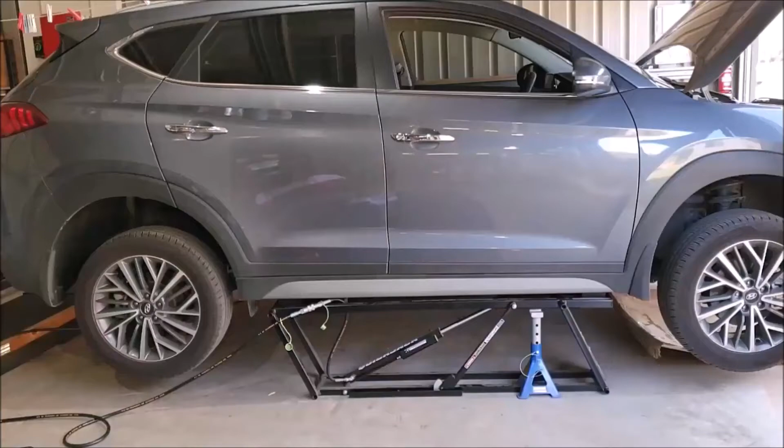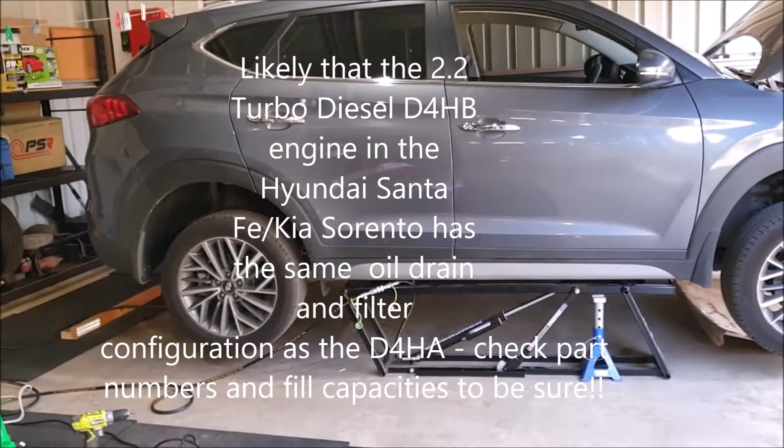Okay, today we're going to do an oil and filter change on a Hyundai Tucson. So this is a 2019 TL series. It has a 2-litre turbo diesel engine. So it's the D4HA Hyundai turbo diesel 2-litre. So that same engine's in the Kia Sportage as well. So if you've got one of those, or anything with a D4HA diesel, this video should apply to you and give you a helping hand.

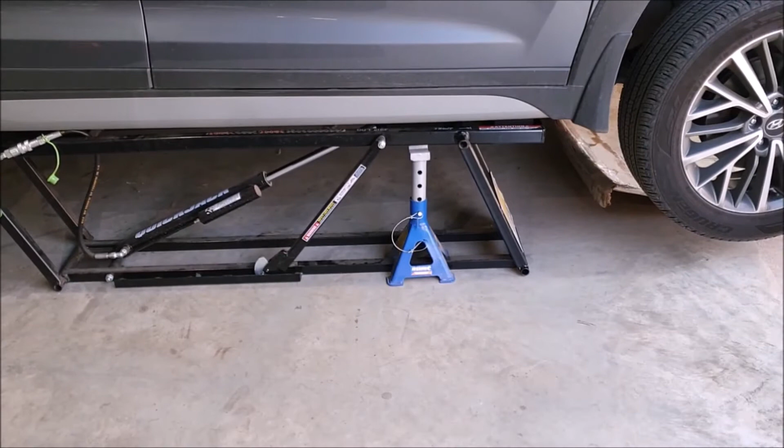So we've been for a drive. The engine's up to temperature. It's been cooling for about 15 minutes. I've got it up on the quick jacks. I've also thrown in some jack stands just in case something fails. We've got something that hopefully might prevent me from dying. Also, I've thrown a sheet of cardboard under the car just to catch any oil spills, just in case I slop some around. Keep the garage floor nice and clean.

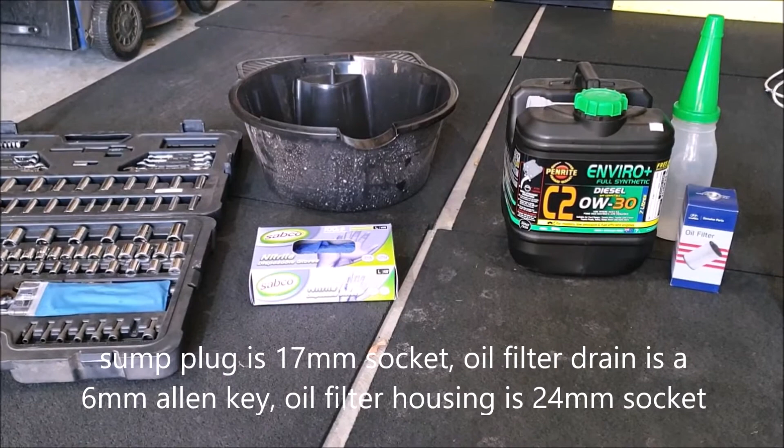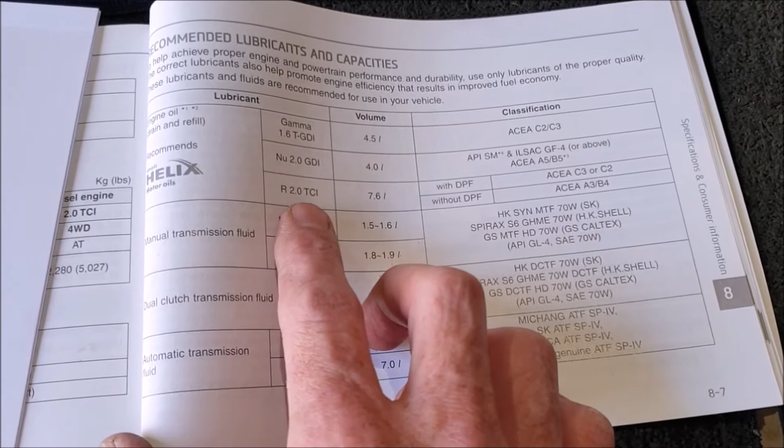So we'll just run through what you're going to need. I haven't got the underside tray off from the engine yet, so I don't know what size socket the sump takes, but I'll fill you in on that as we go through. Okay, so we're going to need some oil. So we're using a C2 0W-30. If you check your owner's manual, you can see here, I'll just try and focus on that. So this is the 2-litre diesel. Sump capacity with a filter change is 7.6 litres.

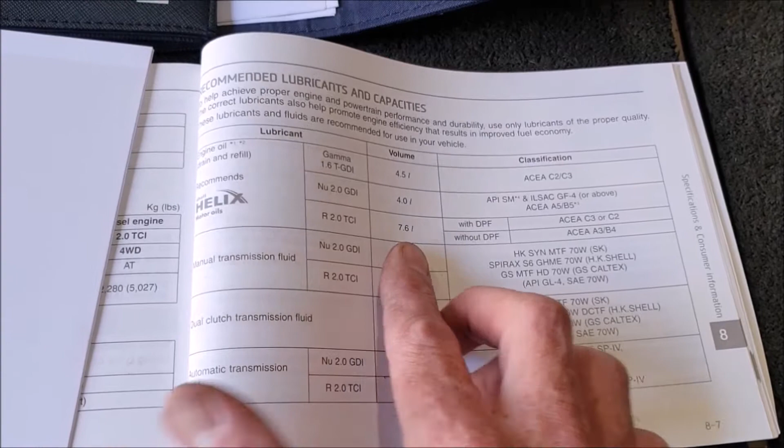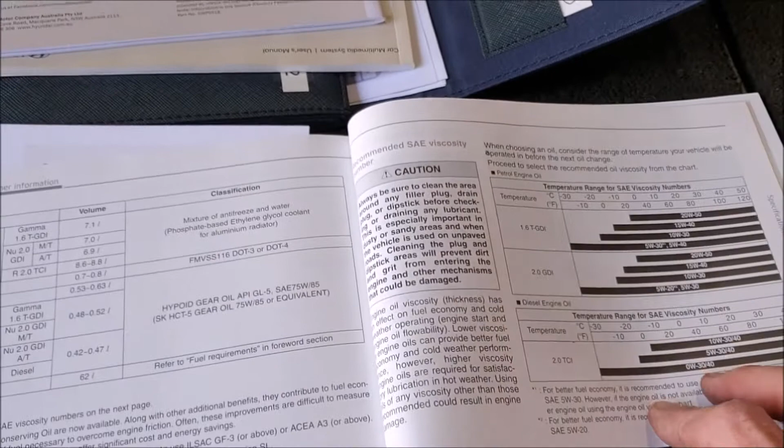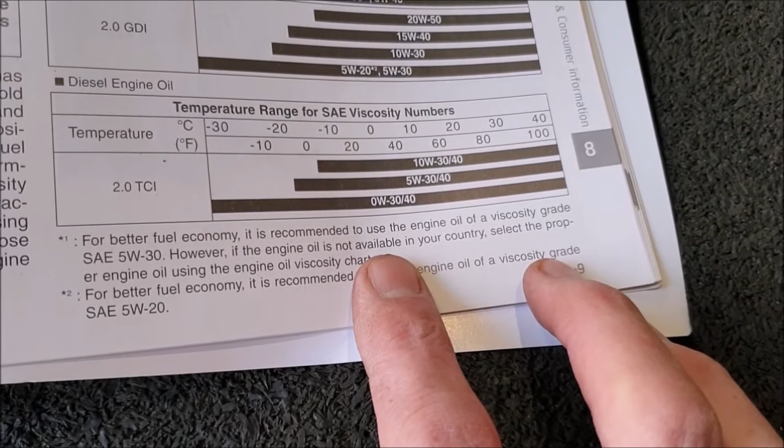So this car has a DPF, so here they're specifying a C2 or a C3. Over the page, or a couple of pages, yeah, here we go here. So this is the diesel engine oil temperature range for viscosity. So we're using a 0W-30 here, so that's got the widest range of temperature application. So most markets will probably be using a 0W-30 or a 0W-40 engine oil.

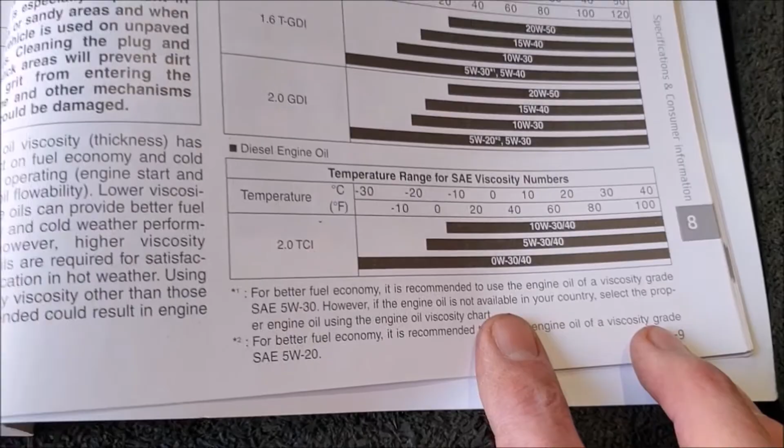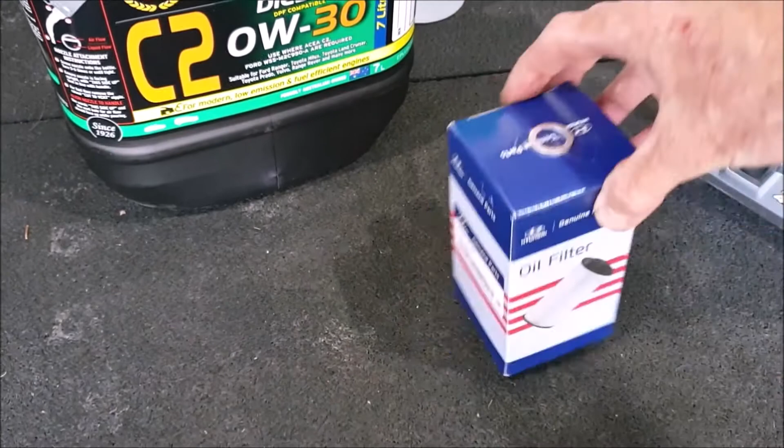Okay, so what are you going to need? You'll need an oil filter. There's the part number there. I'll just stop wobbling around so you can catch that. I'll put that in the description anyway. I picked up that filter from eBay, and they sent me a sump plug washer as well, which was handy. So I don't know the part number for that, but I'll try and find that and put that in the description as well.

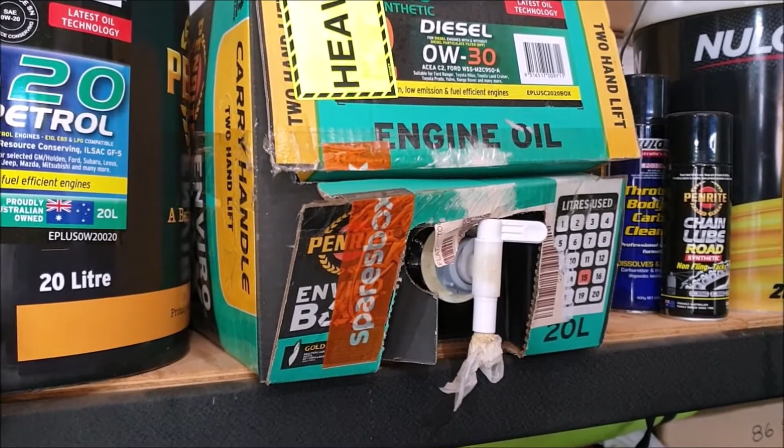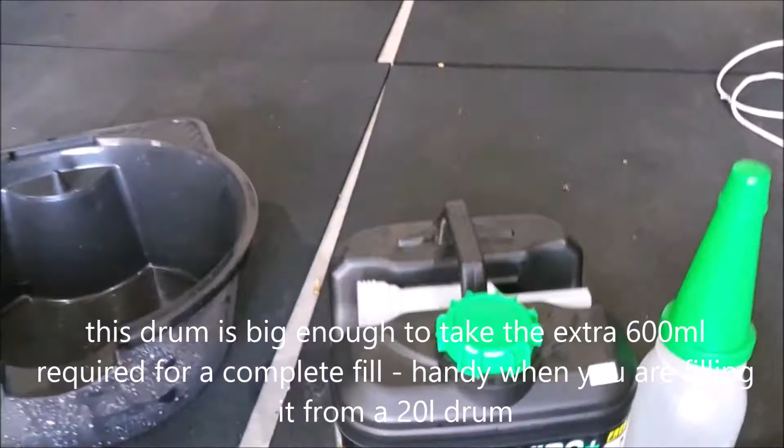Engine oil, so this is a 7-litre drum. Handy because we're going to put 7.6 litres in here. Also got a plastic oil bottle, so I'll be able to measure out another 600 ml from a 20-litre container of the same oil. So if you're going to do your oil changes, try and buy in bulk. You'll save a lot of money doing it that way than buying it by the 5 and 7-litre containers. For your first change, grab a 7-litre container so you can just refill that from the 20-litre drum. Save yourself a lot of money and a bit easier to work with.

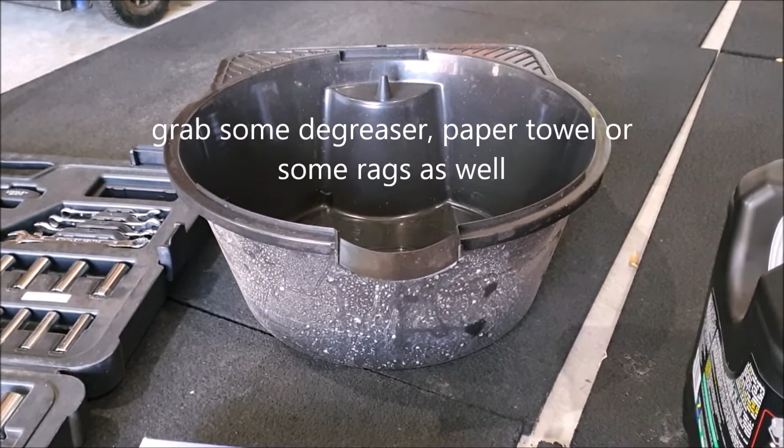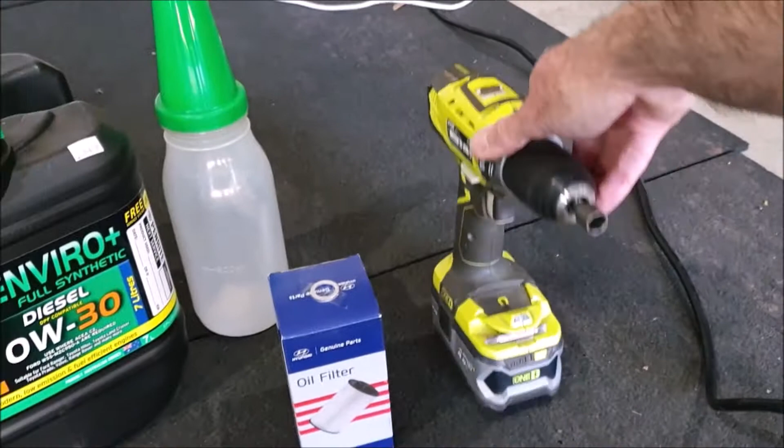A large capacity oil pan, so I think that's about 9 litres. Most of them go to about 6, the standard size one, so make sure you get a bigger one because you've got 7.6 litres of oil coming out of this thing, so you don't want to overflow and spill it all over the floor. Grab some nitrile gloves as well, and you're also going to need some sockets, but as I said before, I'll let you know what sizes you're going to need as we go through. I've also got a cordless drill with a 10mm hex bit on the end of it to get the sump guard off. So we'll go ahead and hop into it.

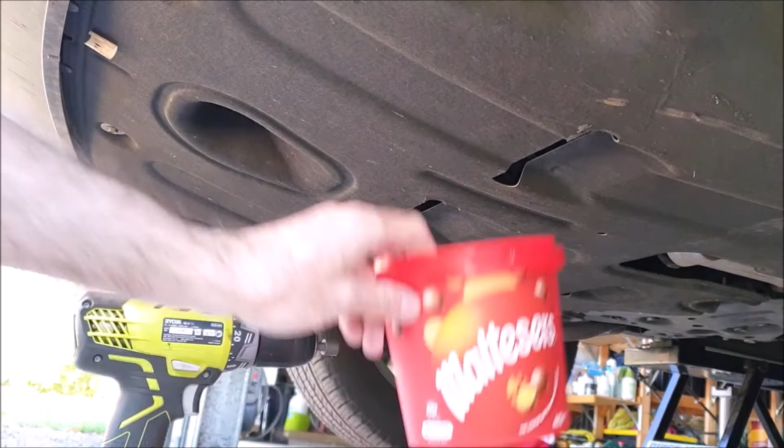Okay, so we're under the car. So we've got to remove this under tray here to be able to get to the sump plug and the oil filter housing. Why they didn't leave holes in here to access those, I don't know, but anyway, this is what we've got. So you'll see that there's a series of these 10mm screws holding this thing up. So I've just missed that one. There's one there. There looks to be about 12 of those floating around. I'm going to just drop them into a Maltesers container. So we'll take all those down and we'll drop this under tray, and then I'll show you the access for the oil filter and the sump plug.

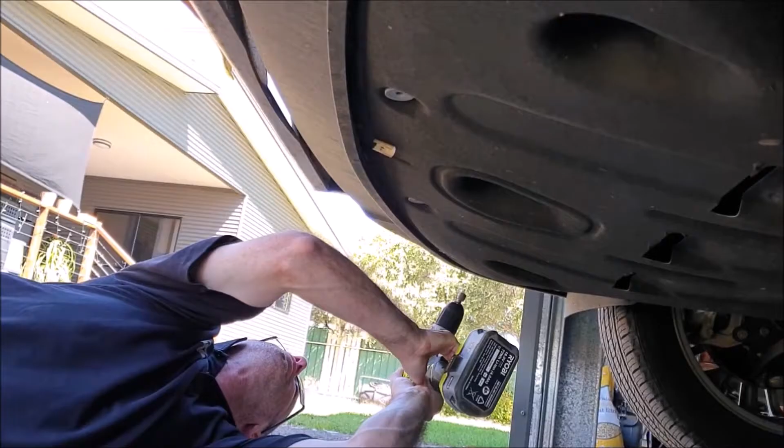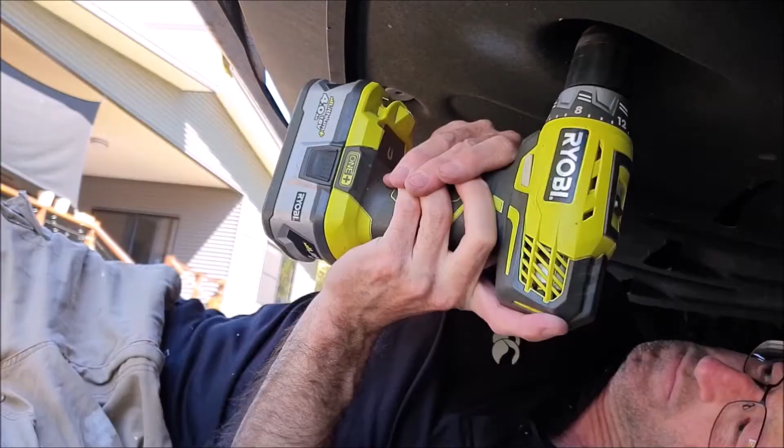Okay, so all of those screws are out there, so this should just go back towards the rear of the car. Oh no, I tell a lie, I've got one left. Okay. So let's pull that out there.

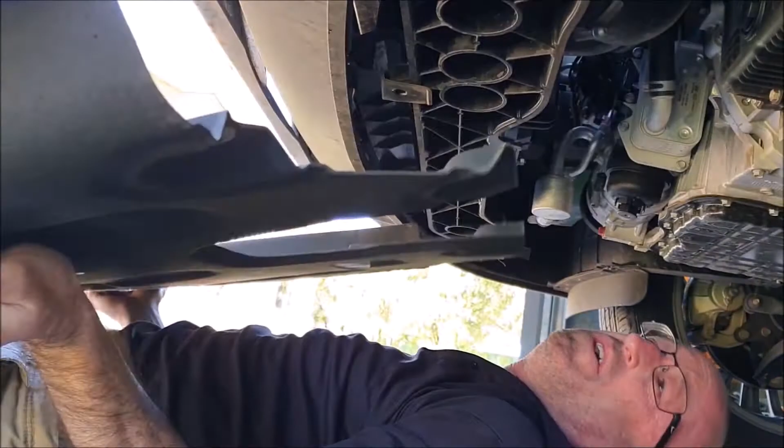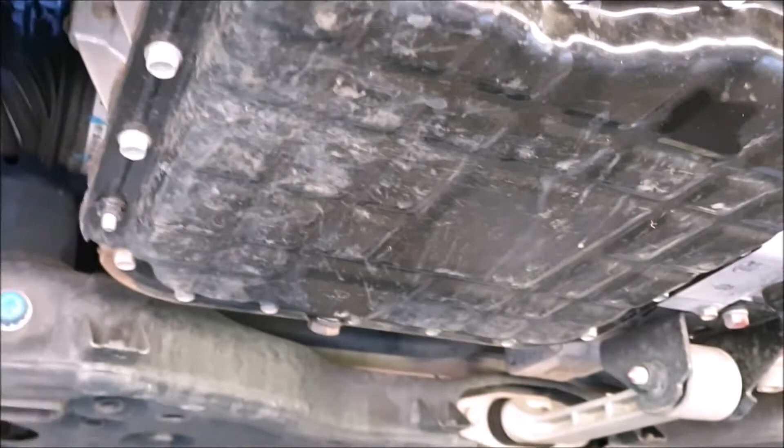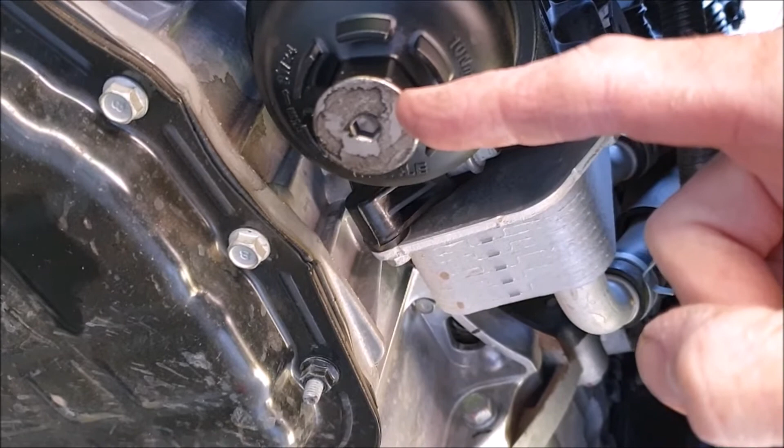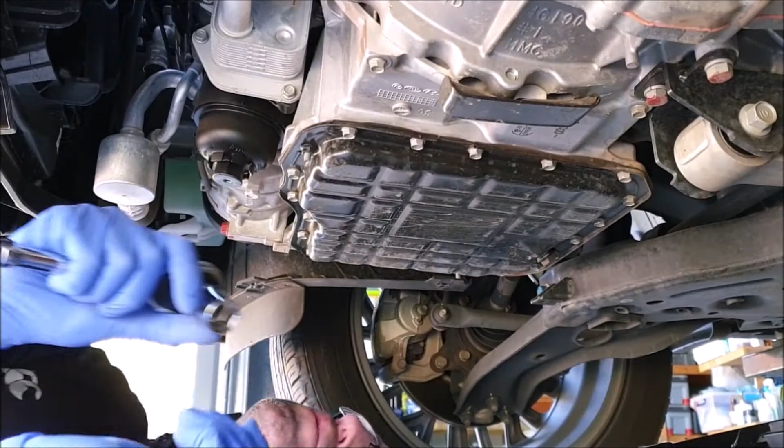Okay, so that is the oil filter housing just there, and then straight back behind it is the sump with the plug just there. So I'll grab a socket and throw that on there, and I'll tell you what size that is. The oil filter housing, I think it's a 6mm hex key that just goes in there to loosen that off, but I'll throw a key on that and tell you for sure. Okay, so the sump plug is 17mm, and as I said before, the Allen key that you're going to need to loosen off the filter housing is 6mm.

So we'll go ahead and loosen off the sump first, and we'll drain that, and once most of the oil's out of there, we'll go ahead and remove the filter housing. Because of the design, this thing is going to be full of oil, so you need to have your sump pan underneath that when you drain that. Other cars that I've worked with, they've had these up the top, so that makes it a lot easier and less messy. Anyway, that's how they've done it.

So we'll just loosen that off, and hopefully land the oil in the pan and not on the cardboard, which isn't so bad. At least it's not on the garage floor. Right, there we go. So we'll just let that drain for 15 minutes.

And once it's done that, we'll replace the sump plug washer that's sitting on there. I'll clean that up a bit so you can see that, and then we'll get that back in, and then we'll move the drain pan forward underneath the filter housing, and we'll remove that.

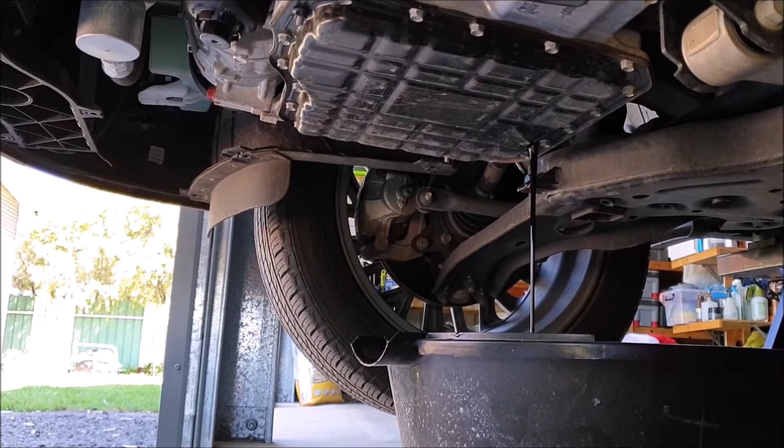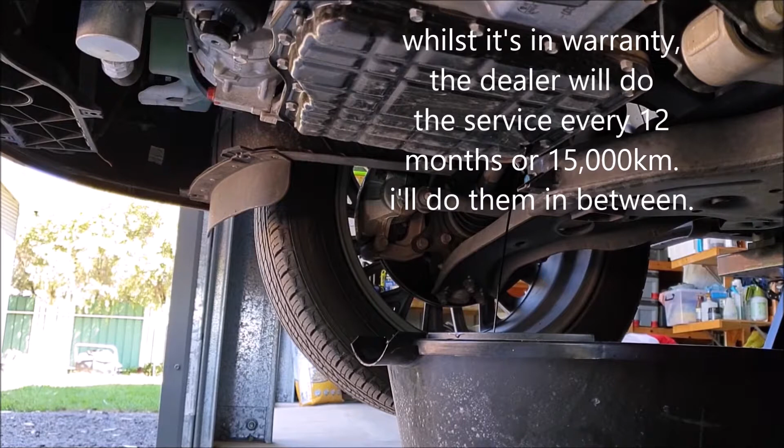Okay, so while that's draining, these vehicles have a 12-month or 15,000 kilometre service interval, whichever comes first. I'm planning on keeping this car for quite a while, so I'm doing the changes every 7,500 kilometres or 6 months, whichever comes first. Generally we rack up about 26,000 Ks in this over a year, but due to the COVID shit going on at the moment, we've done a lot less than that.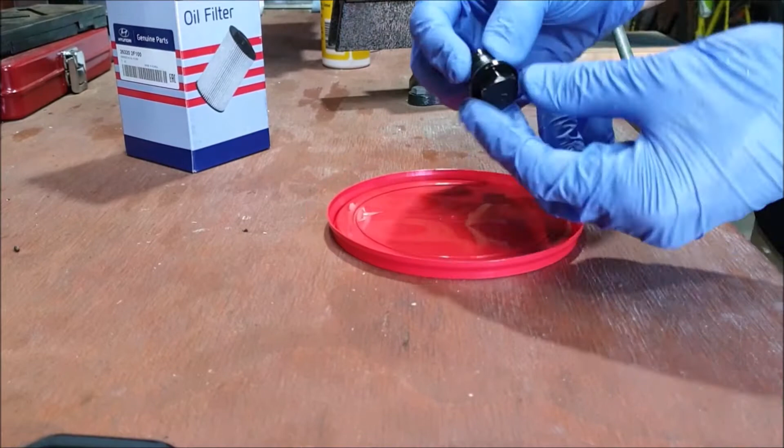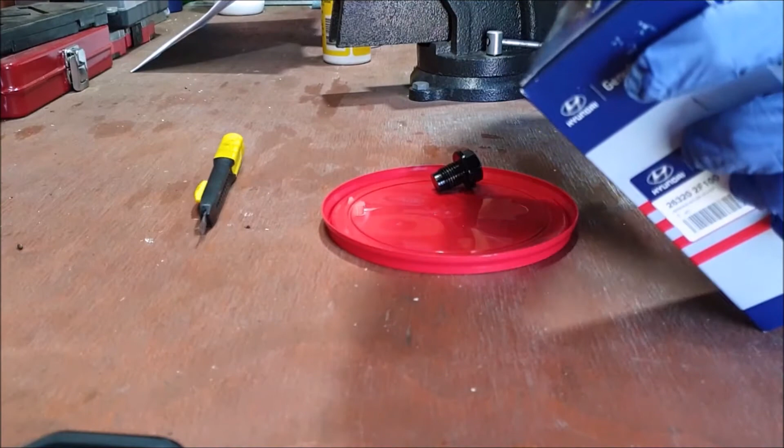Okay, so we've got our sump plug. We'll just take the old sump plug washer off there. You don't want to reuse these; they're all crush washers, so reusing them might lead to a leak, and you don't want that. Yeah, so it's just come off there like so. So that's going in the bin. As I said, the seller kindly included a sump plug washer with the filter, so I'll just throw that on. That just goes on there like that, ready to reinstall.

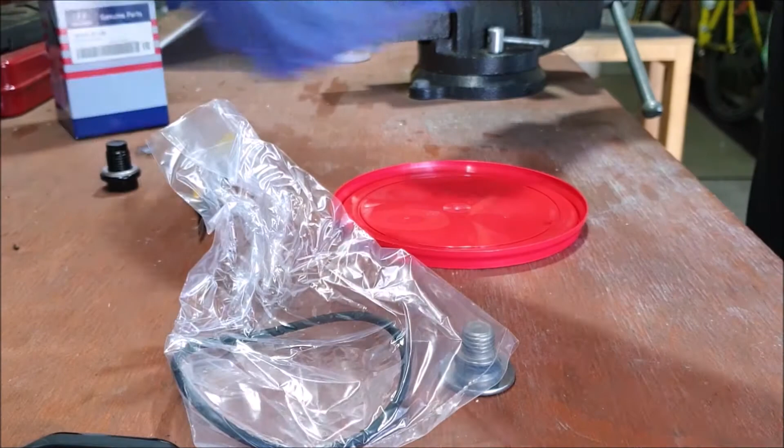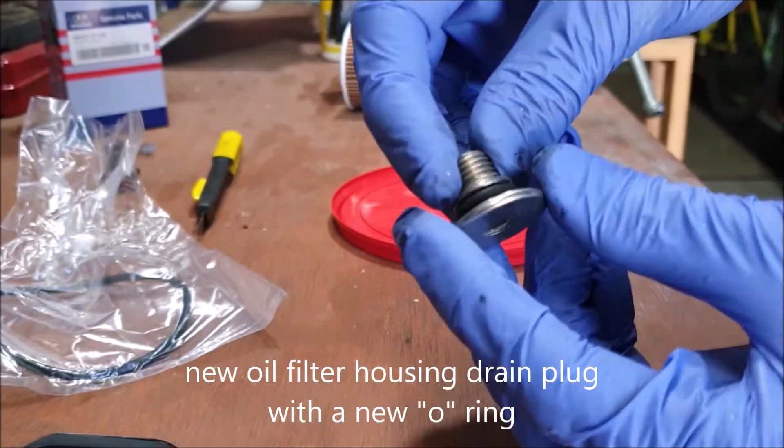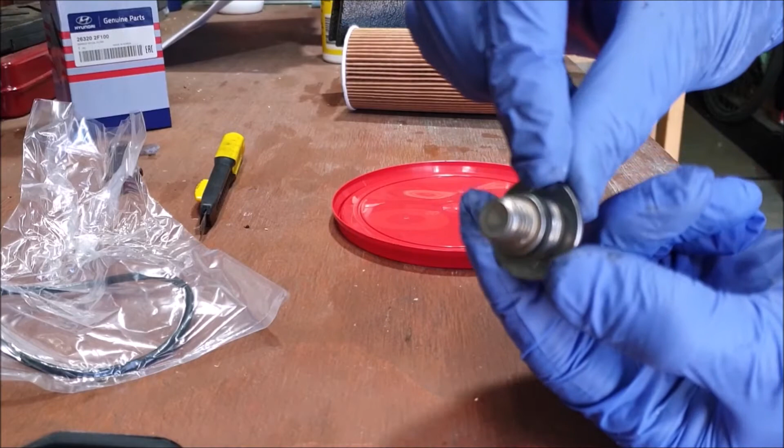I'll just show you this filter. Okay, so you get the filter. There's also an O-ring to go around the filter housing. I'll show you that when we come to install that. And they give you a new bolt, likely because it's got a washer on the end of it. Yeah, that's interesting. I thought they would have just given you a new O-ring rather than giving you the whole thing, but that's what they've done.

Okay, while you've got that guard off and the oil's draining, it's a good time to have a look around underneath the car and see if there's any other issues. So I've found one. So you can see here I've got a lot of oil coming out of the front of the automatic transmission. So I'll be drawing that to Hyundai's attention at its next service.

So yeah, have a good look around underneath the car and just make sure that you don't find any leaks or busted boots or anything like that. And yeah, you can take note of those and just get them fixed at the next service. This car's still under warranty, so we'll have them attend to that.

Okay, we'll get the sump plug back in. Just clean that up with a bit of rag. Still dripping a little bit, but it's not too bad. So you want to put this in by hand all the way as far as you can. Clean a bit of oil off it. Yeah, do it up by hand and then put a tool on it. If you put a socket on it straight away and you cross thread it, then you're buggered. So don't do that.

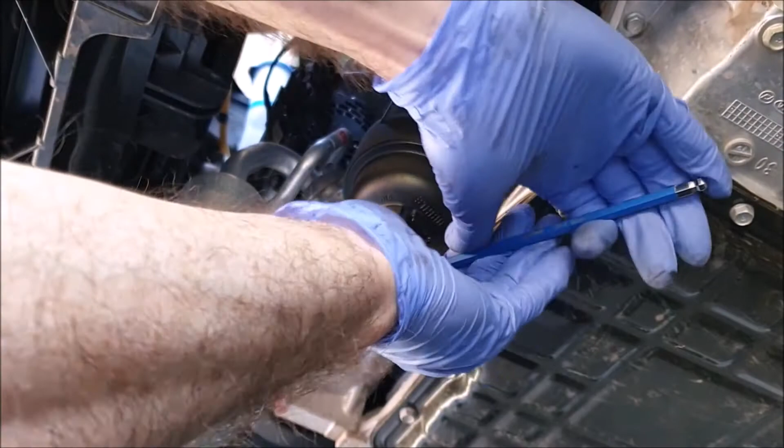Lefty-loosey. So that just unscrews there. And you should get oil coming out of this because there was an O-ring on it. So I guess the idea is that this will drain all the oil out of the filter housing and then you can remove it.

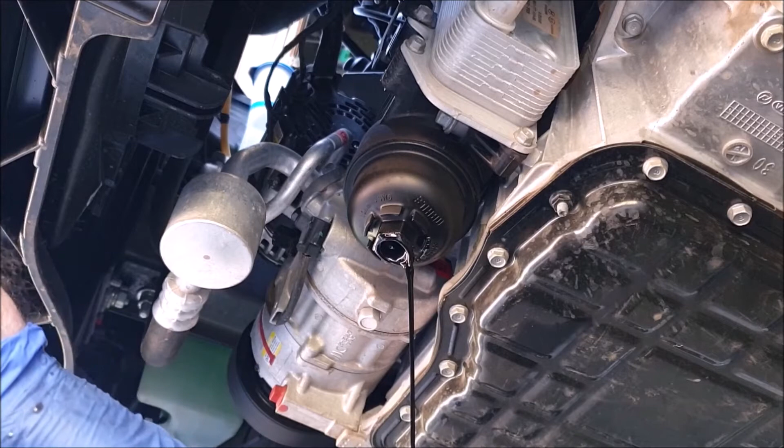So it's loose there now. Hopefully our aim is right and this will go into the oil pan. Right. As I said before, this bit here is a throwaway item, so I'll chuck that in the bin. I'll just let that housing drain completely and then we'll get a socket on that to remove that housing. I'll let you know what size that's going to be.

It's there as a drain, so you don't make a mess when you take this thing off. So they've made that bigger than the size of the socket that's going to go on there to remove that. So you must remove this first and then get onto that. Okay, the socket you're going to need to remove the filter housing is 24mm. So we'll get onto that. So once again, lefty loosey.

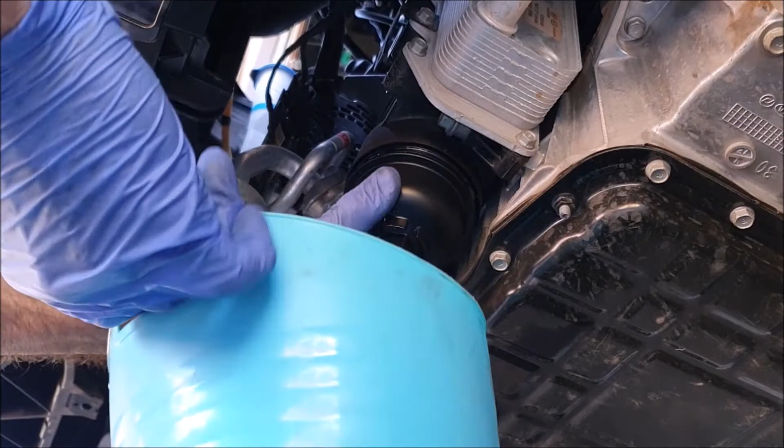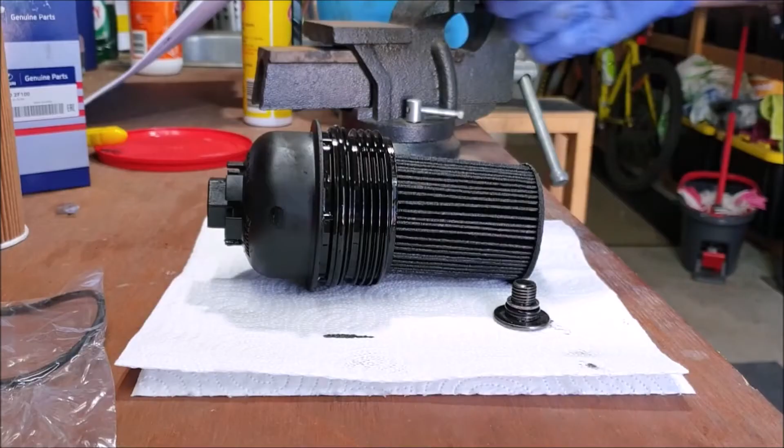Okay, so that's hand tight now. I just grabbed another container to drop that into. Okay, so I'll throw that in there. I'll just take that over to the bench and I'll show you how to fit the new filter. Okay, so we've got the oil filter housing, so that gets thrown because it's got an O-ring on there, and they supply you with a new one, with a new filter, so that goes in the bin.

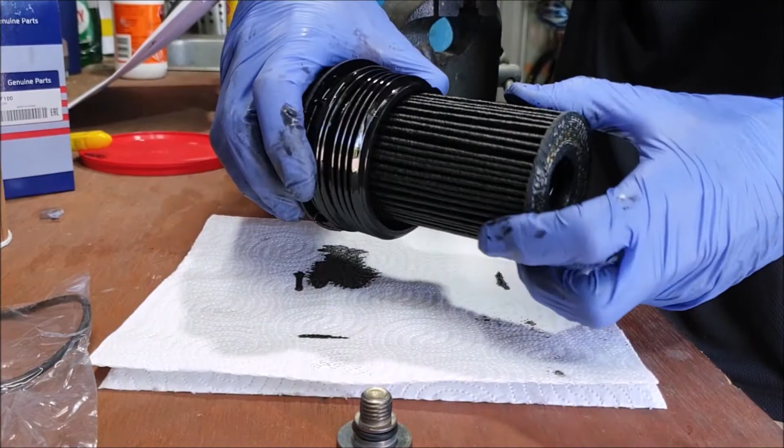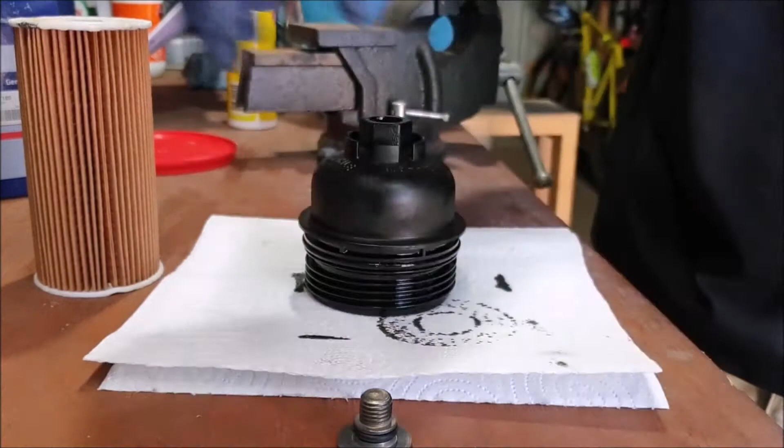The filter should just pop out of there like so, so that's going in the bin as well. You can see that there's writing on the bottom of it. I don't know whether there's a right way or a wrong way to fit this, but we'll fit it the same way. So that's going in the bin. You'll also see with your new filter that you've got a new O-ring, so that goes on here. So we've got to get the old one off. Just grab a small flat screwdriver and just pull that off there.

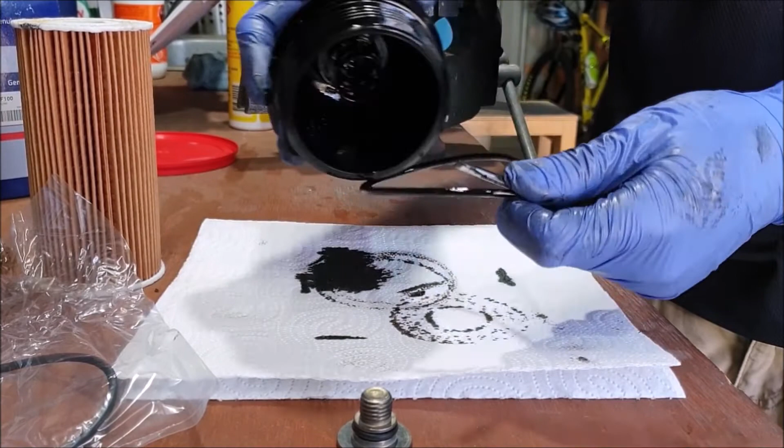Very important you take that off. Get rid of the old one, throw it in the bin, and replace that. Do that right now. So that's on there. We'll just run a bit of oil around that as well, just so it doesn't bind when it's getting put back in. And then we can push our new oil filter on there. So that just clips in there like so.

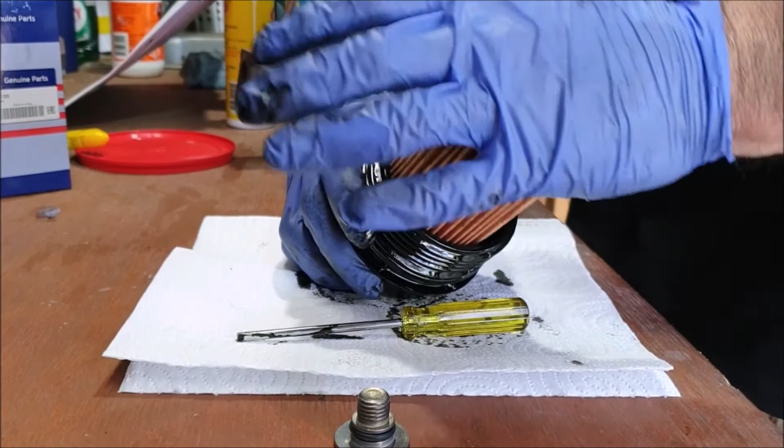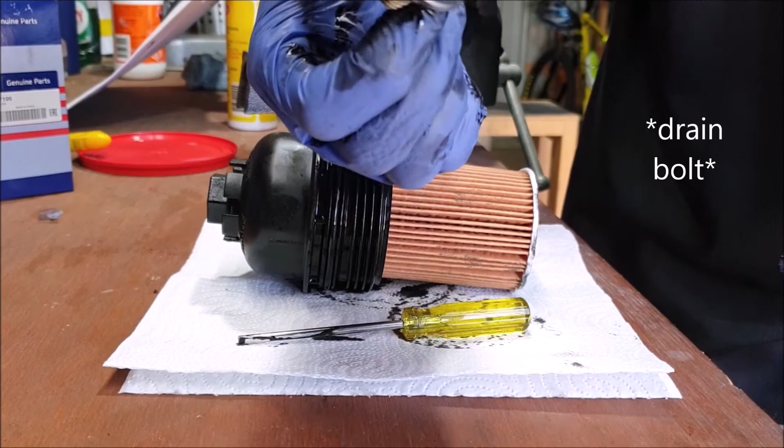So that's ready to get screwed back on into the car, and then we'll finish it off with that drain bolt that goes on the bottom of there. Once that's in, I'll spray it down with a bit of degreaser and clean that up a bit. Okay, so we'll get that back in the car. Get this filter in. You can see that there's oil dripped down the side of the sump. So yeah, we're going to need some degreaser to clean that up, but that's no problem.

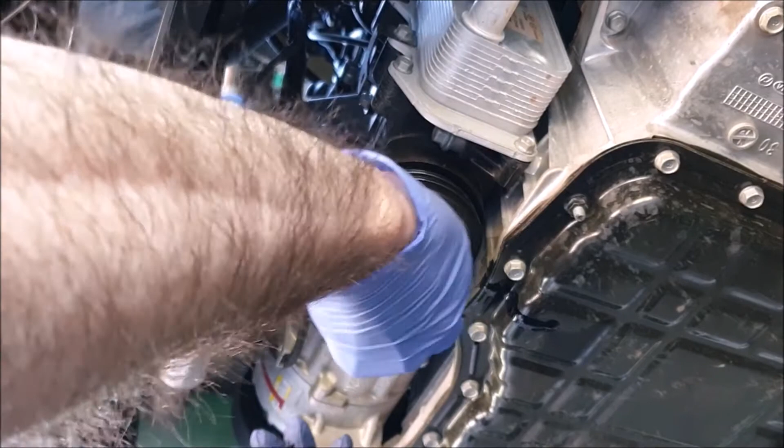Okay, so filter housing goes back in as it came out. Once again, screw this in as far as you can by hand, and then get a socket on it. So that's about as far as I'm going to get. So we'll get our 24mm socket back on there. Get that tightened up all the way. Okay, so it's tight there.

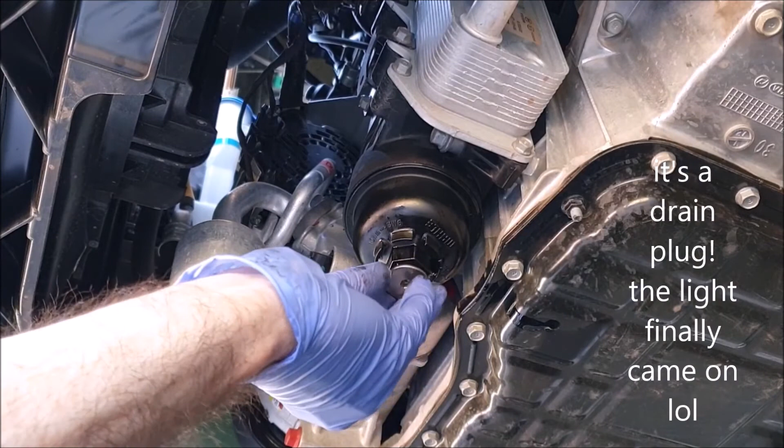Now we just grab our retaining bolt, or drain bolt, I guess it is. Yeah, that'll be what it is, a drain bolt. Good thinking, Hyundai. And get our 6mm Allen key on that. Right, so that's pretty firm in there. So yeah, I'll get some degreaser and spray that down a little later on.

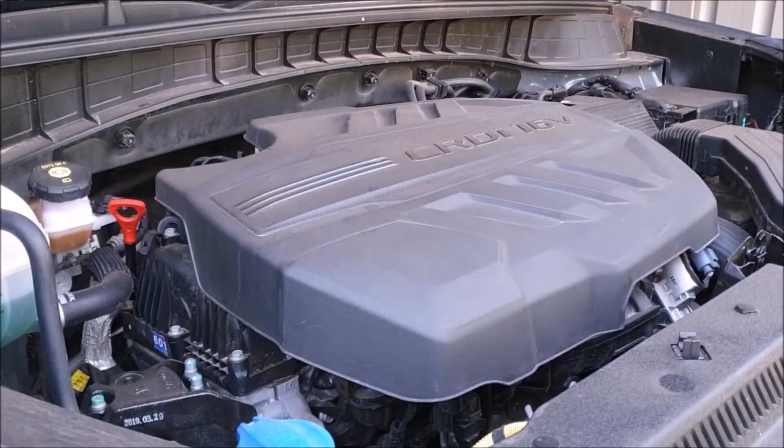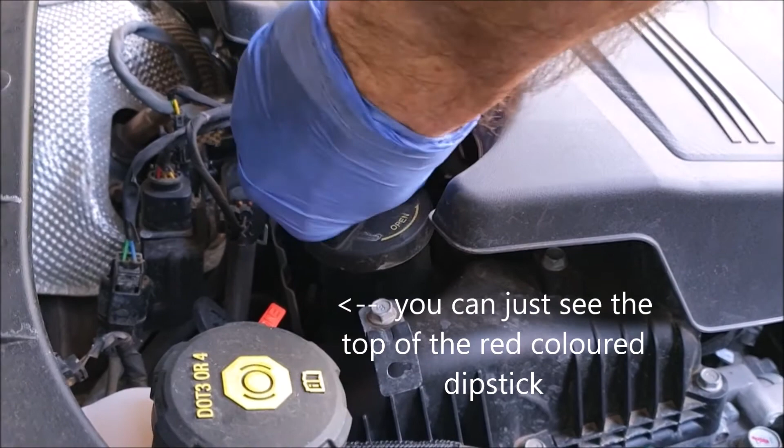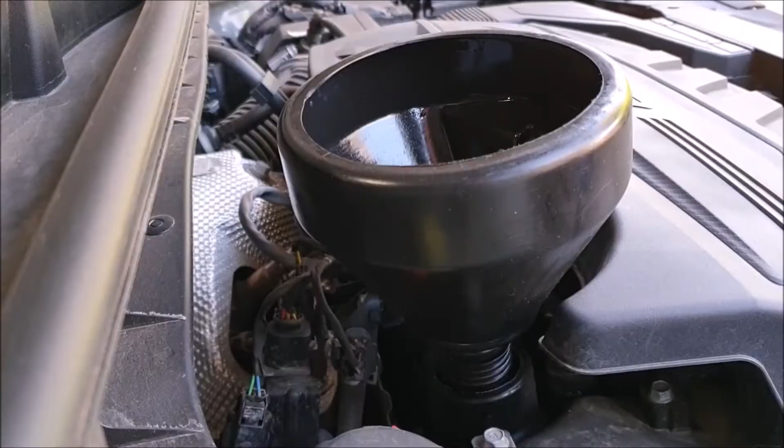Okay, so now it's time to get some oil in the engine. So from the front of the car, the oil filler is just on the back of the engine cover, just down here. So we'll loosen that off and grab a funnel, and we'll get our engine oil in there. Okay, so using our 7-litre container, we'll pour some oil in there, and then we can top it up with the balance, which is 600ml.

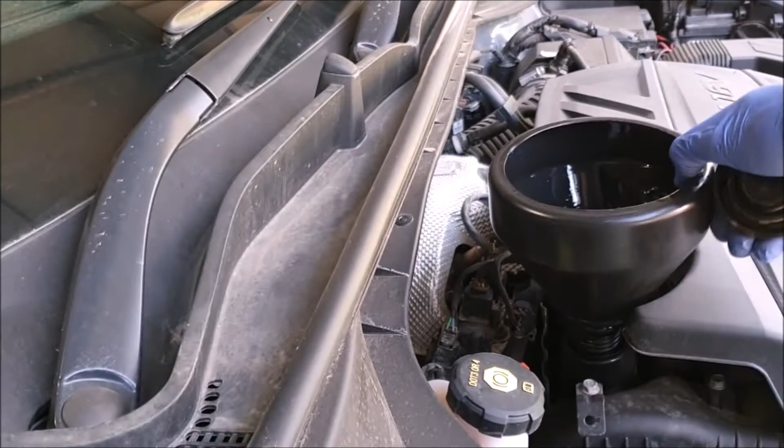So we've got all our oil in there. So the only thing left to do really is to throw back on the oil cap, clean up underneath the car around the oil filter housing, just where it's dripped down under the sump there. Just use a bit of degreaser on that. And once that's done, you can just go ahead and put the engine cover on underneath, and you're done. So hopefully that's provided people with a bit of assistance who want to DIY oil changes on this platform.